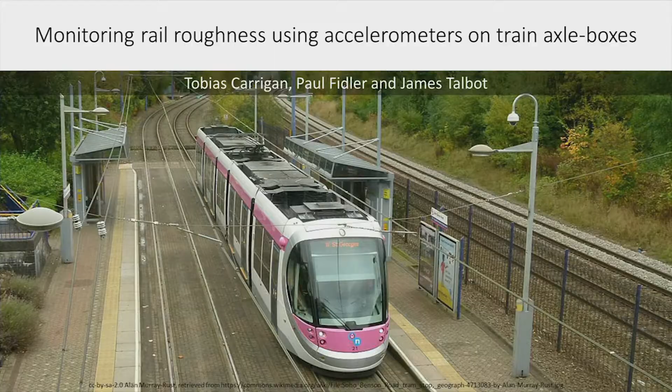So why am I doing this? The roughness of railway tracks increases over time due to wear from trains, and this typically occurs at wavelengths from 3 centimetres to 2 metres.

Sometimes this wavy pattern appears in the railhead, which is called corrugation. This is a problem for rail operators because corrugated rails create high levels of noise and vibration, which is a nuisance to people living near the railway, as well as damaging trains.

Currently, the railways are manually inspected for high levels of roughness, such as by using dedicated measurement trains. But this tends to be costly and time-consuming.

So I'm proposing a more efficient method, which is to use sensors on in-service trains, as I said previously.

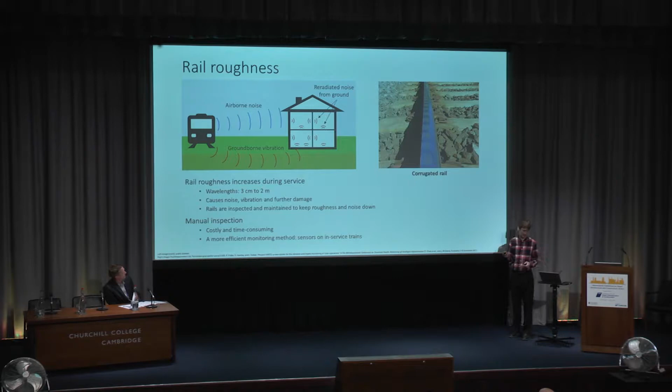There are sensors that directly measure rail roughness, such as by physical contact or lasers, but these tend to be fragile and awkward to maintain, so they're not suitable for in-service trains.

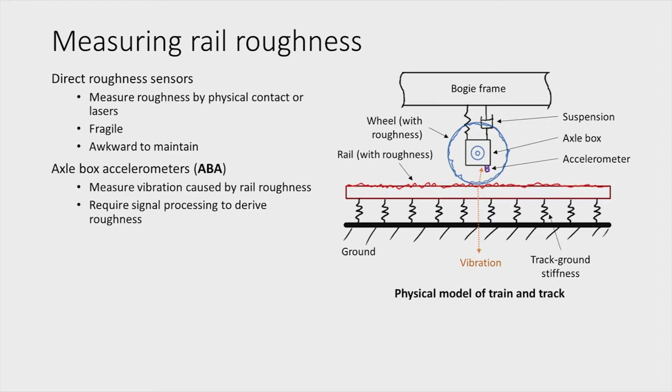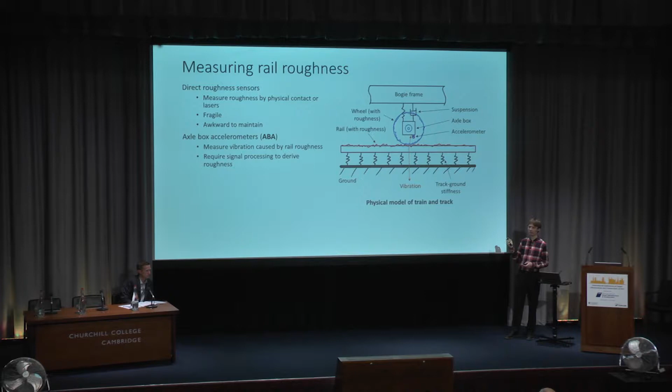Instead, accelerometers are more suitable because they are practically maintenance-free, and we fit one of these accelerometers onto a part of the train's bogie called the axle box, and we call it an axle box accelerometer, or ABA, not to be confused with the band.

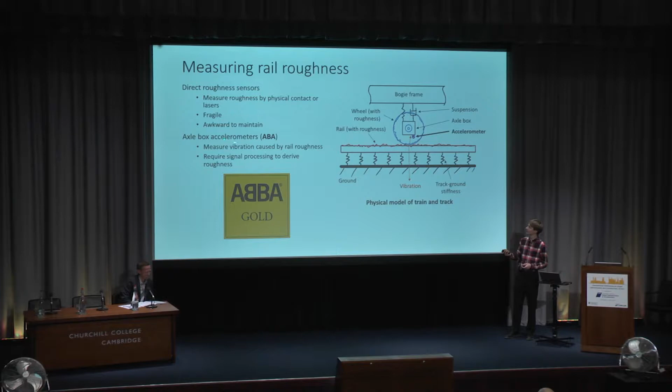ABA measures vibration caused by rail roughness rather than the roughness itself, so it requires signal processing techniques to derive the roughness from the ABA measurements.

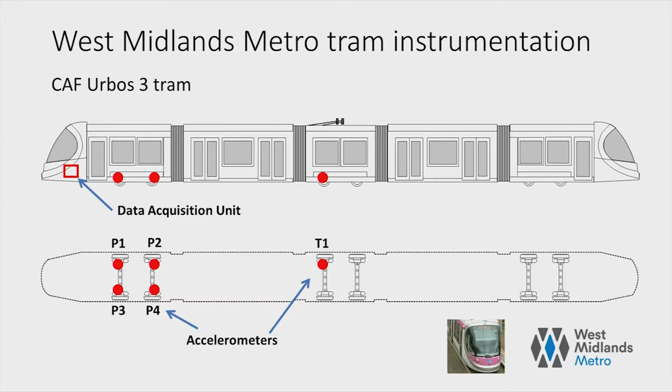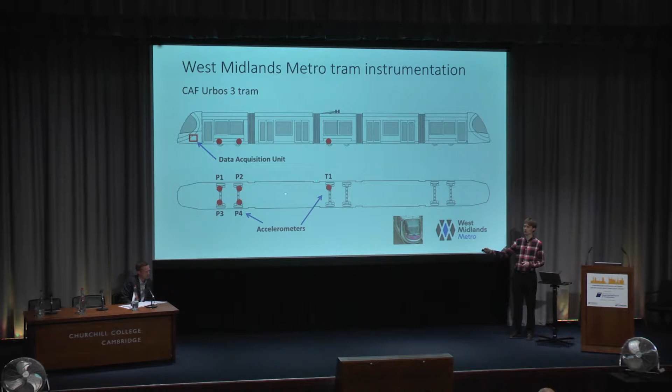We have collected measurements from a trial system on one of the West Midlands Metro trams. This is a CAF Urbos 3 tram, and it has independent wheels connected across by axle beams to enable a low-floor design. We fitted 5 accelerometers, 4 on the front power bogie and 1 on the trailer bogie.

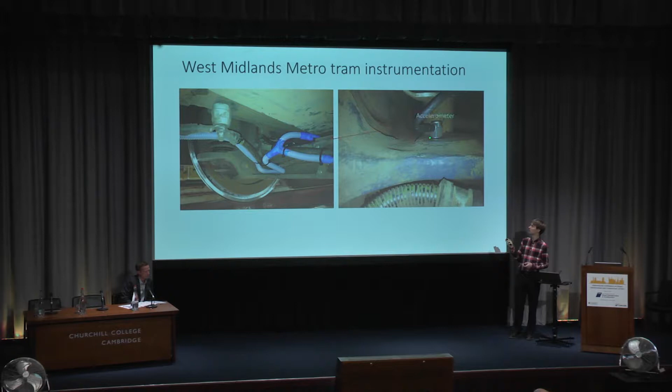This shows one of the axle beams, and this is one of the accelerometers attached to the beam near the wheel bearing.

Now I will show you measurements from the system, which covers the West Midlands Metro network from Wolverhampton to Birmingham.

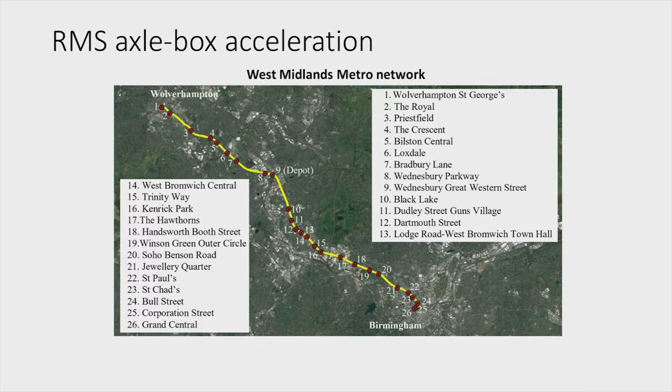This graph shows the root mean square, or RMS, of ABA from Wolverhampton to the middle of the network over 50-metre segments. It shows data from April 2017 to October 2018, heading down the colour spectrum, and the symbols here show where the stations are.

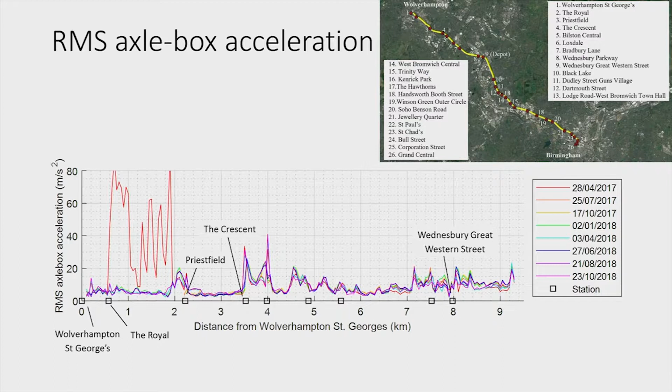In mid-2017, the track between The Royal and Priestfield was very rough, but it was replaced in December that year, and you can see the big difference in RMS levels here.

Now, these measurements don't quantify rail roughness by themselves, so they need some signal processing techniques to derive rail roughness from ABA, which is what rail operators would like to measure.

Rail roughness is connected to ABA through the dynamic train track system. This is a diagram of the train track system, which has a wheel and track with a roughness profile moving between the wheel and rail and exciting vibrations in the system.

We are measuring ABA, which I'm assuming is the vertical acceleration of the wheel. The key point here is that the measurement depends not only on rail roughness, but also on the system itself, so we need to know the system in order to derive rail roughness from ABA.

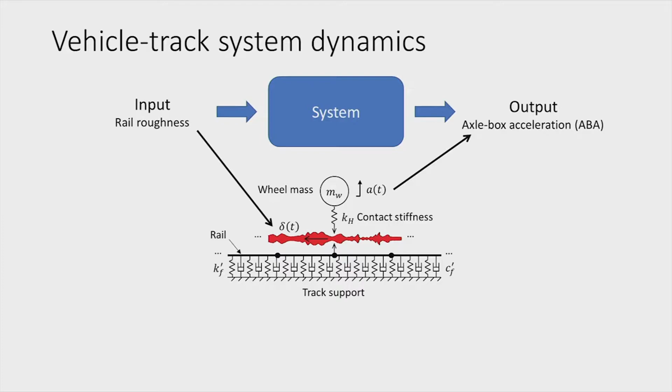I can represent the system as a transfer function, h of omega, and this graph shows what h of omega might look like.

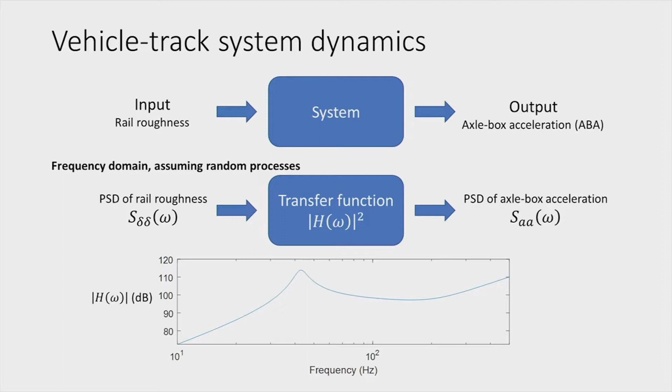To get rail roughness, if we treat rail roughness as random processes, then the PSD of rail roughness is multiplied by the square of the transfer function to get the PSD of ABA.

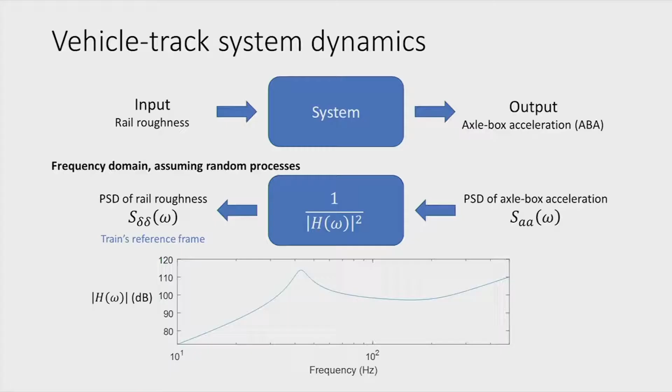Now we can derive the roughness by simply inverting this transfer function, but we want the roughness in the fixed reference frame rather than from the train's point of view. So we translate it into the wave number domain.

Wave number is the number of oscillations, radians of oscillation per meter rather than per second. So that removes the dependence on the train motion.

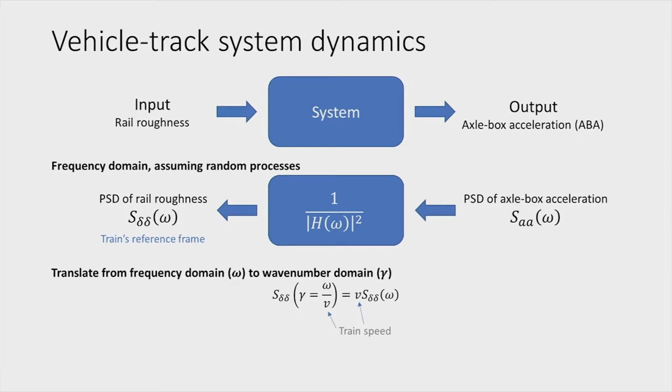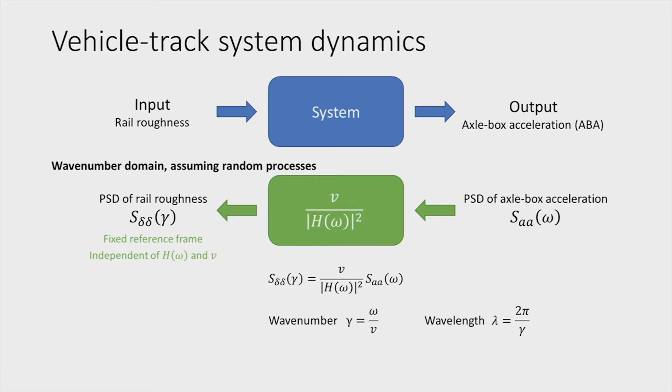This leads us to the final equation. And for completeness, wavelength is 2 pi over wave number. The roughness PSD shows the amounts of roughness at each wavelength, independent of the transfer function and the train speed, which will be useful for rail operators to optimize track maintenance schedules.

I'll go into some more detail on how we calculate the power spectral density of the ABA signal. We use the square magnitude Fourier transform, which we call the periodogram, and we apply a window function to the signal before taking the Fourier transform.

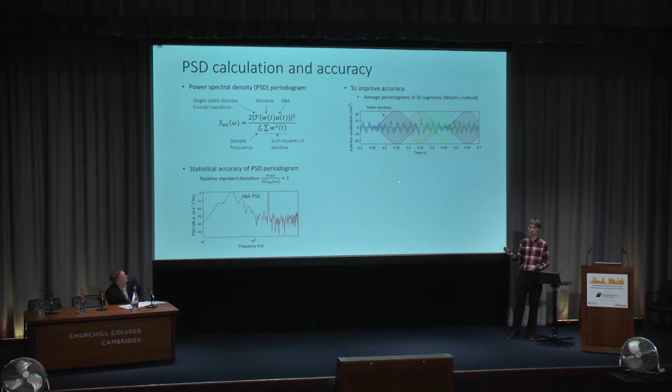One way is to average together periodograms of multiple segments of the signal, which is essentially Welch's method. This method splits the tracks in the signal into several segments, which are overlapped with each other, and a hanning window is applied to each segment.

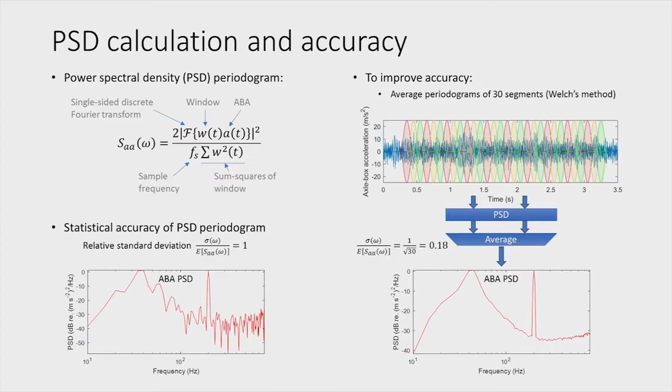I use 30 segments in total to improve the statistical accuracy, and this makes the spectrum much smoother. Now, improving the accuracy trades off the resolution of the spectrum, and this trade-off depends on the requirements of the system.

For our work, we've used the standard EN 15610, which is commonly used in industry and by researchers to plot rail roughness spectra.

It recommends a spatial resolution, or total track length, of 60 times the maximum wavelength, and a segment length of 4 times. So that's why we chose 30 segments. This diagram shows how the wavelength, segment length, and spatial resolution are correlated with each other.

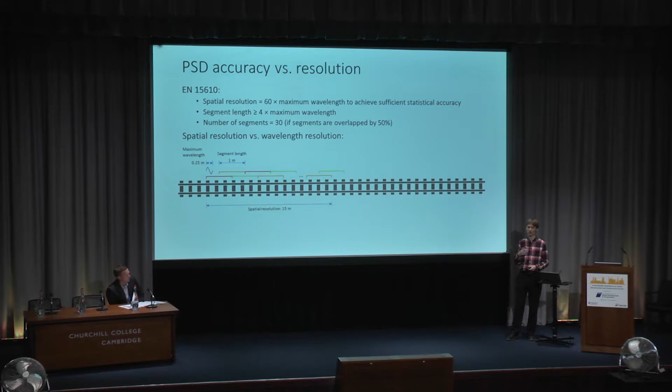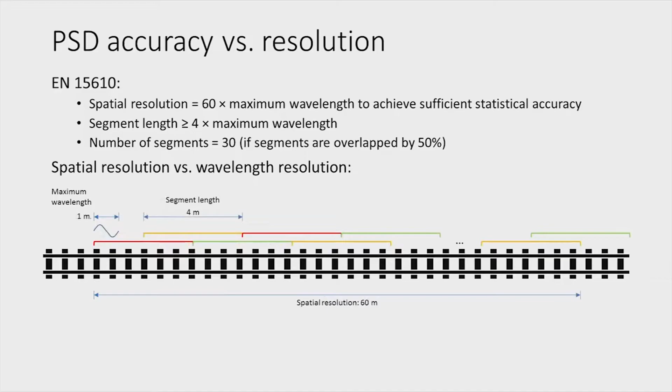The standard specifies wavelengths up to 0.25 meters, but actually corrugation can occur at longer wavelengths as well, and ground-borne noise is also relevant at these longer wavelengths. So we chose to increase that to 1 meter, which gives this segment length and spatial resolution.

The same standard also recommends plotting the roughness as third octave spectra like this. I wonder if you've seen a third octave spectrum before. You can see on the wavelength axis that the wavelength doubles every 3 bands. The y-axis is in decibels relative to 1 micrometer, so 0 decibels is an RMS amplitude of 1 micrometer.

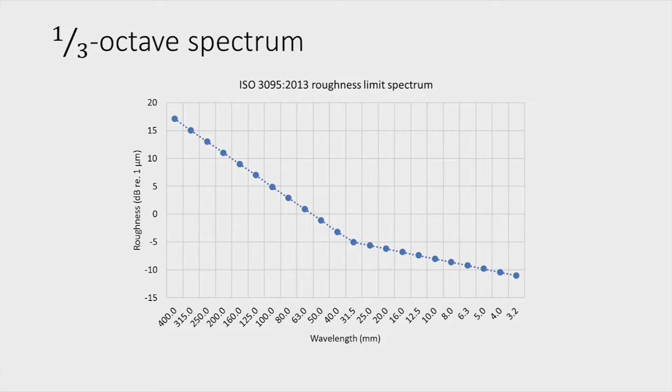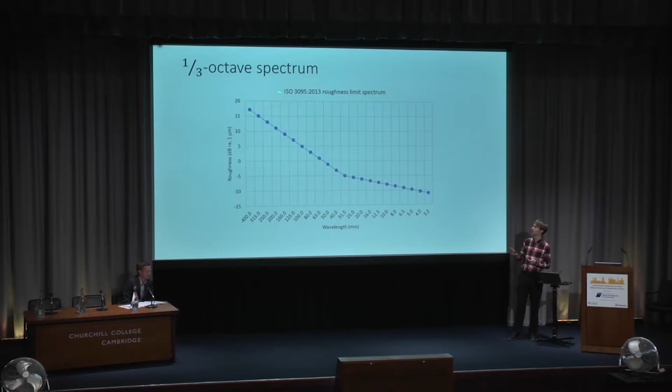This particular spectrum is the limit spectrum for the roughness of a section of test track that is used to type test new rail vehicles, and it's given in this standard, ISO 3095. But it's a useful spectrum because it's close to the typical roughness of railway track, so we use this spectrum in our simulations.

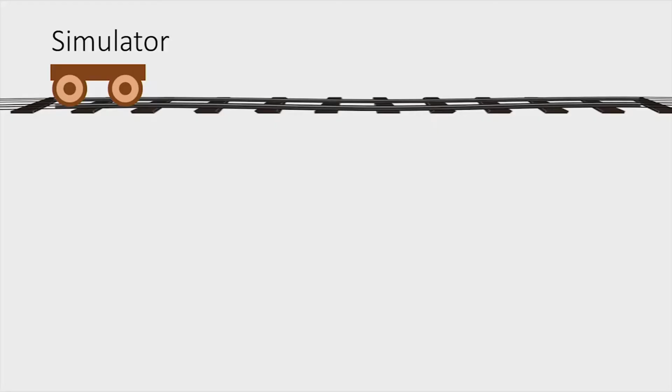We have developed a theoretical simulator to test and evaluate the techniques to derive the roughness from ABA. The simulator uses a time domain model, based on a beam on elastic foundation to represent the track, and a lumped mass to represent the unsprung mass of the train. This may appear oversimplified, but the wheel mass is essentially decoupled from the rest of the train by the soft primary suspension.

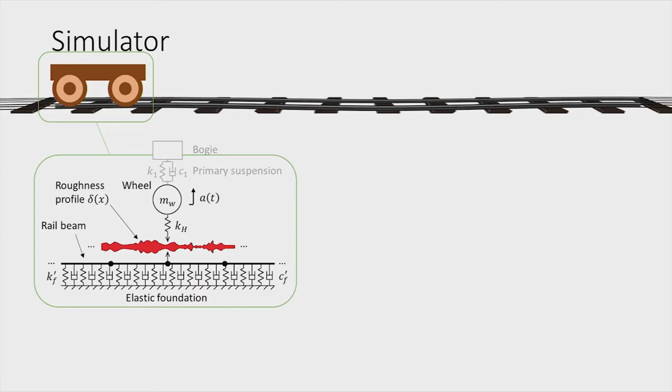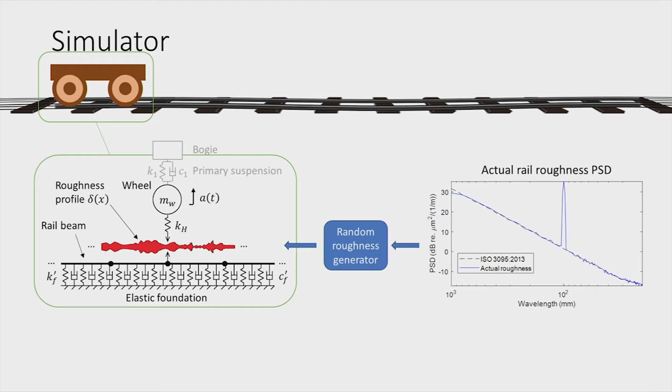The simulator calculates an ABA signal given a rail roughness spectrum and the parameters of the system. I chose the ISO 3095 spectrum, but with a sine wave peak added to represent corrugation, and I generate a random profile for the simulator.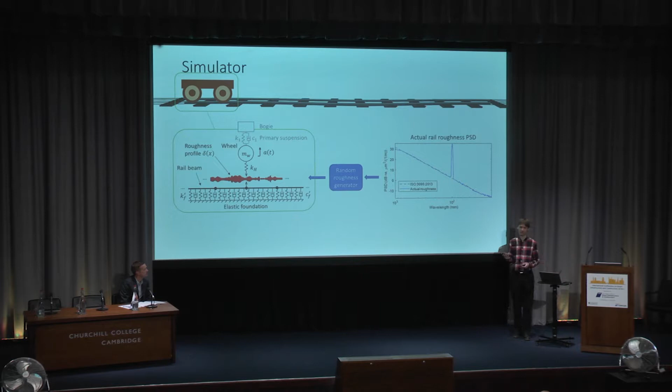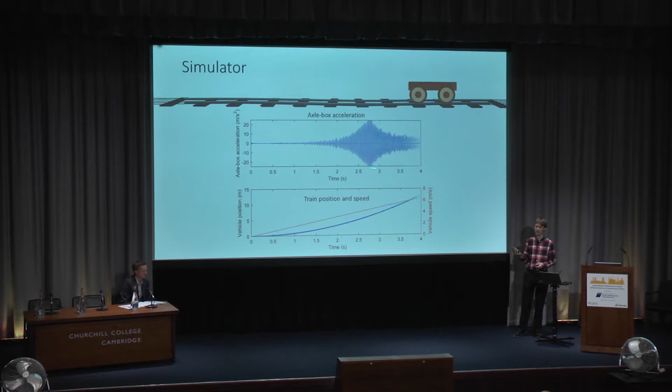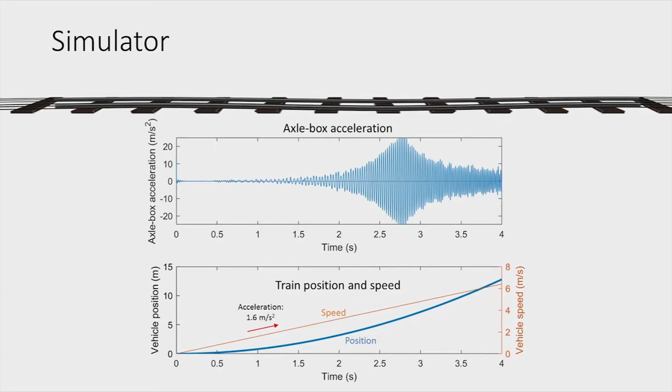Suppose that the train is stopped at a station on the left, and now it is accelerating, and we're recording the ABA signal arising from the roughness on the track, along with the train speed. As you can see, the signal is very low when the train is slow, but as it speeds up, the magnitude increases through a resonance, and the frequency increases as well.

Now, I'll show you how I use a modified form of Welch's method to calculate the PSD of rail roughness for a train that is varying its speed along the track.

I split the track into 4-meter segments like this that are overlapped by 50% and map these segment boundaries onto the ABA signal like this.

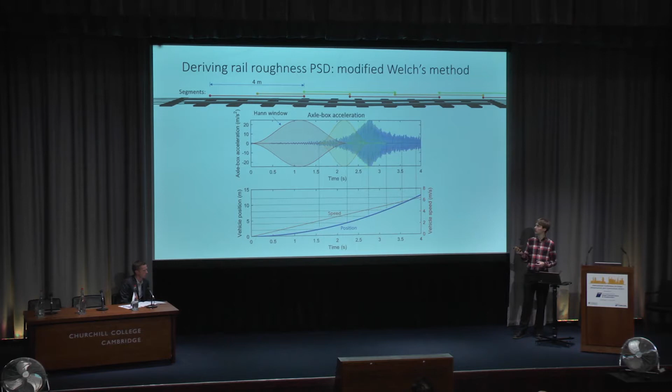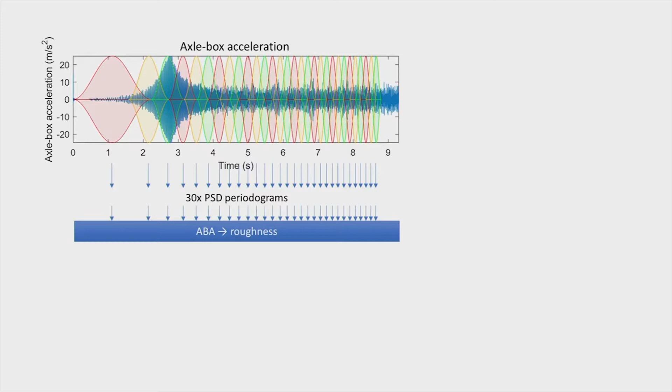I take the segments and apply a Hann window to them like this, up to 30 segments. I then calculate the PSD periodograms of the ABA segments and derive the roughness periodograms, translating them to wave number domain using this equation.

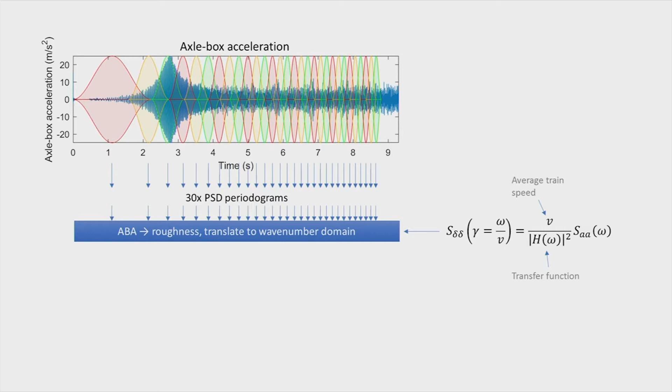The translation uses the average train speed in each segment, like this. Finally, I average together all the 30 periodograms, which gives me this spectrum. I can see that the derived spectrum is very close to the actual roughness, but the peak is smeared out.

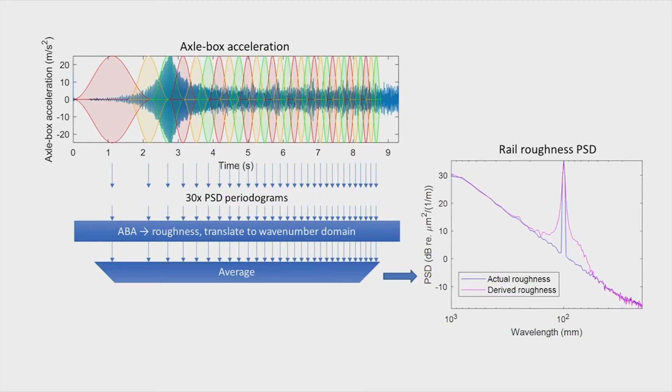This smearing is caused by the assumption that the train speed is constant within each segment, but actually it is varying. So how do I reduce the smearing?

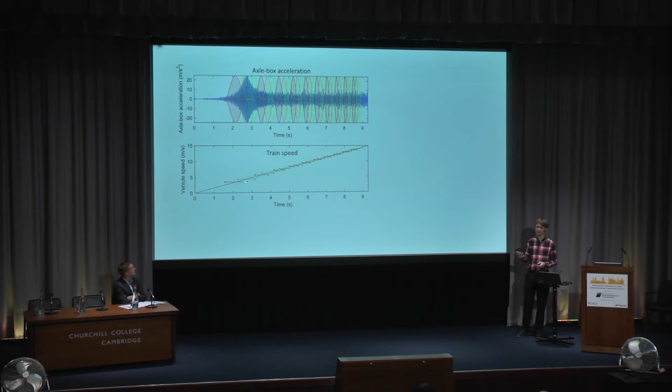Actually the smearing is coming from the first segment because that has the widest speed range. So I can reduce the smearing by removing this first segment. Now comparing the results with and without that first segment, you can see that has reduced the smearing.

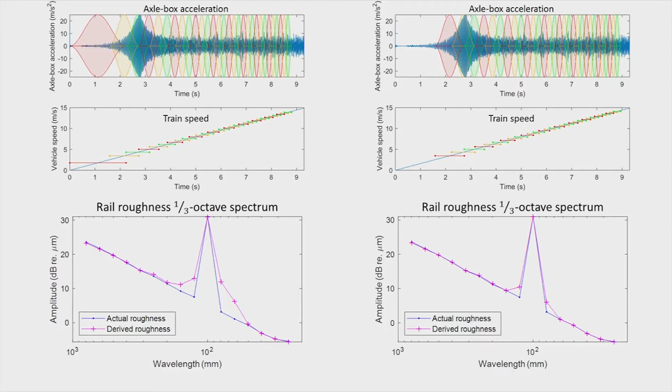I'll replot this as third octave spectra to see more of a real-world impact. I can see that there's still too much smearing, so I will take another segment away, and a third one. And now you can see that the derived roughness agrees with the actual roughness very closely.

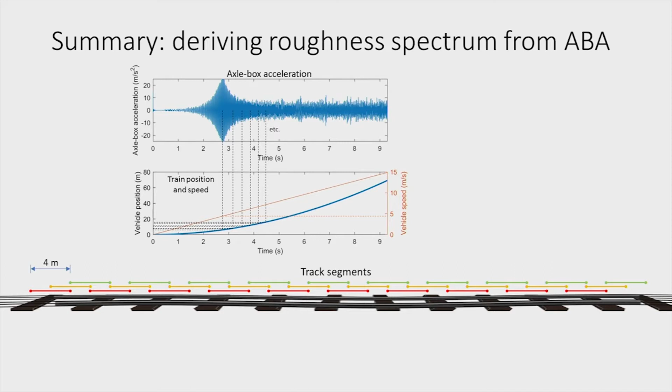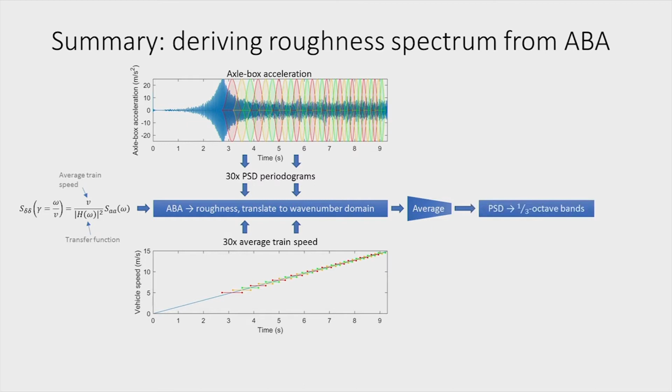I've used the segments at vehicle speeds above 5 meters per second, excluding only 6 meters of track. Just to recap, I split the ABA signal into segments according to vehicle position, excluding data below 5 meters per second. I then calculate the periodograms of the segments, translate them into roughness in the wave number domain using the average train speed, average the periodograms together, and plot them as a third octave spectrum.

So far, we've assumed that we know the system exactly, but in reality we don't have the exact transfer function for a real railway vehicle and track. But we can approximate it using a model like this.

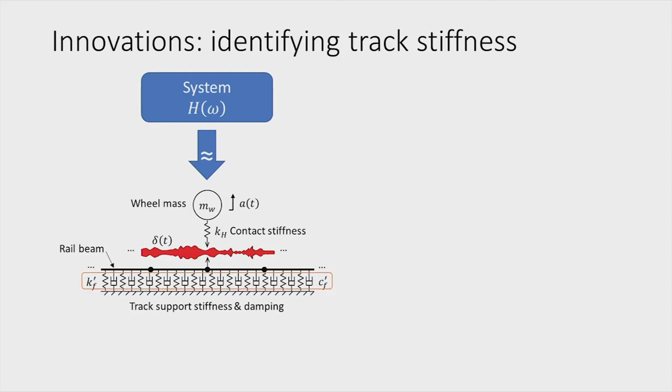Looking at the model, most of the parameters can be measured or calculated, but the track support stiffness and damping is probably the least known and most varying of the parameters. This is a problem that is perhaps blocking the widespread use of axle box accelerometers, as this idea has been around for at least 10 years.

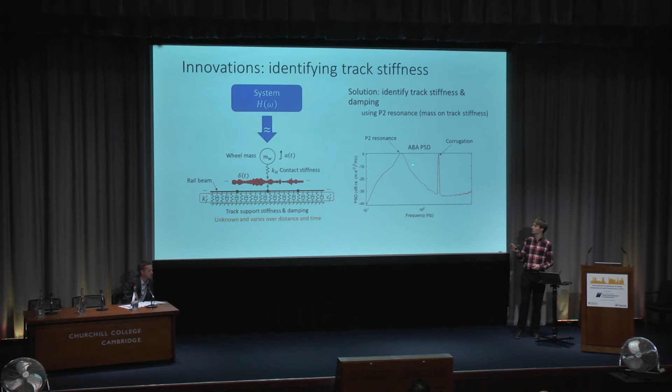So we're developing a solution to this problem that identifies the track stiffness and damping using the P2 resonance in the ABA spectrum. This resonance is the wheel and rail masses vibrating on the track stiffness. Knowing the vehicle and rail parameters, we can derive the track stiffness from the frequency and width of this P2 resonance.

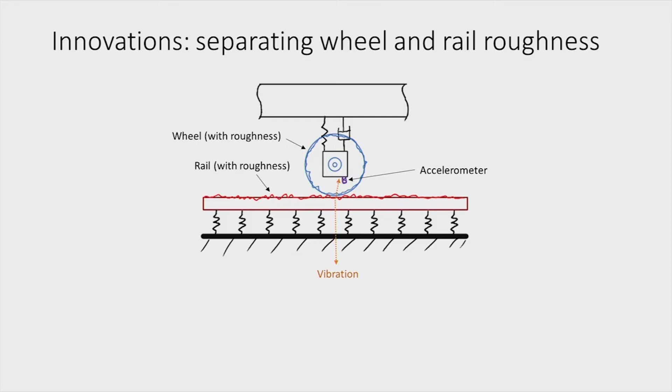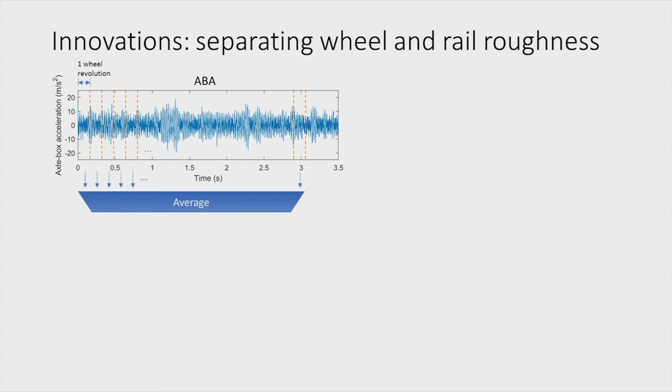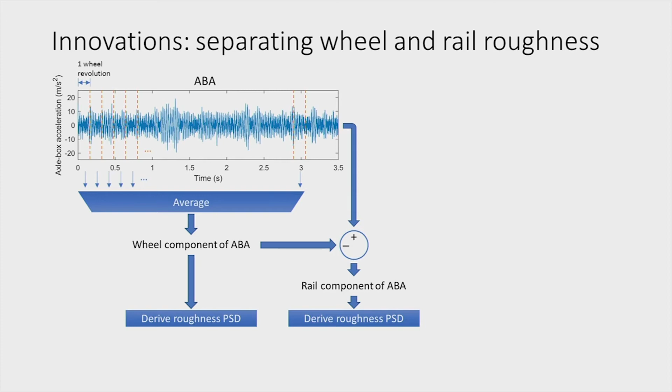Another problem we've tackled is that the wheel can have roughness as well as the rail, and both are added together in the ABA signal. But we can separate the wheel and rail roughness spectra by averaging together portions of the ABA signal over consecutive wheel revolutions. This gives us the wheel component of ABA, and the rail component is the signal minus the wheel component. Putting these through the roughness derivation techniques gives the separated wheel and rail roughness PSDs.

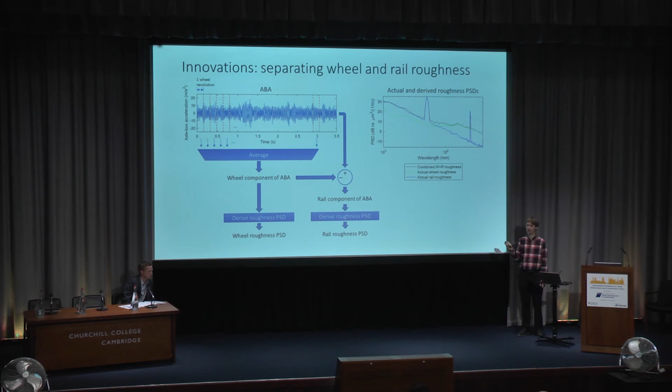To test this, I've simulated a combined wheel and rail roughness profile, where the green line is the actual wheel roughness and the blue line is for the rail. I'm going to add the results onto the same graph — this is the derived wheel roughness, and the red line is the rail. You can see that they agree with the actual spectra very closely.

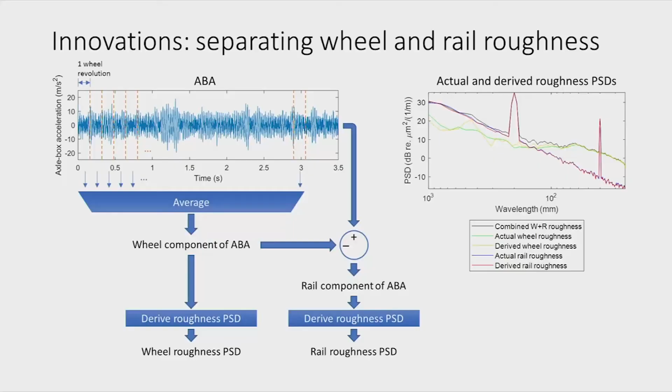To summarize, we are measuring rail roughness because it causes noise, vibration, and damage to the infrastructure as well. Axle box accelerometers can be a more cost-effective way of monitoring the condition of a rail network.

I've demonstrated a technique to derive the roughness spectrum from ABA, given the transfer function and train speed. The track stiffness can be identified from the resonances in the ABA spectrum. I've discussed the trade-off in accuracy and resolution of the spectrum, and I've plotted my spectra according to this standard.

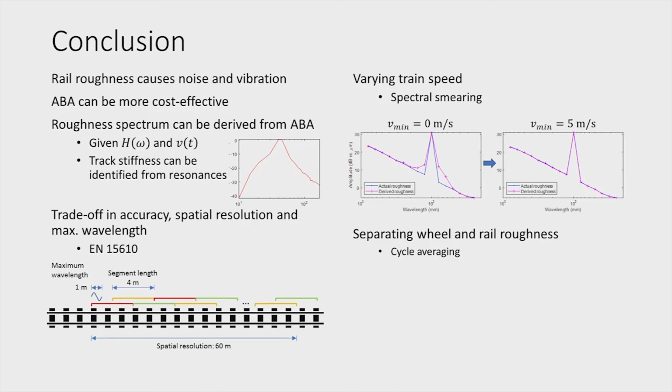I've shown that varying train speeds can cause smearing in the spectra, but if it excludes segments at vehicle speeds below 5 meters per second, then I can limit the smearing. Finally, I've demonstrated how wheel and rail roughness can be separated by cycle averaging, which is another issue with using axle box accelerometers.

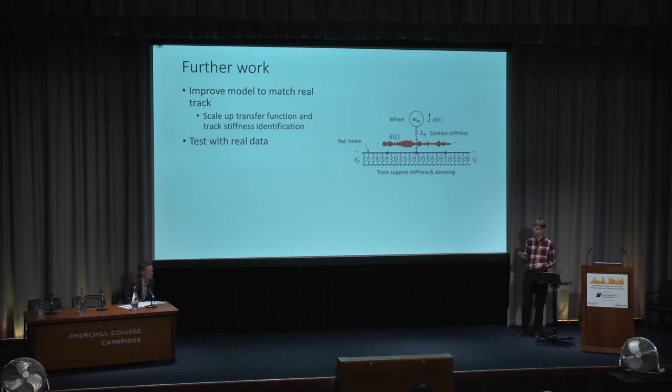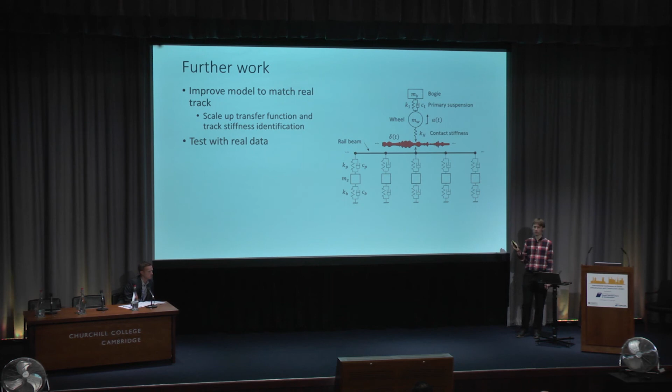So far, we have tested these techniques in a simulated environment with a simple model of the train and track. Further work will scale up the track model and techniques to approach the behaviour of real track. Once we have achieved this, we will test the techniques with real data and compare them with existing methods of measuring rail roughness.

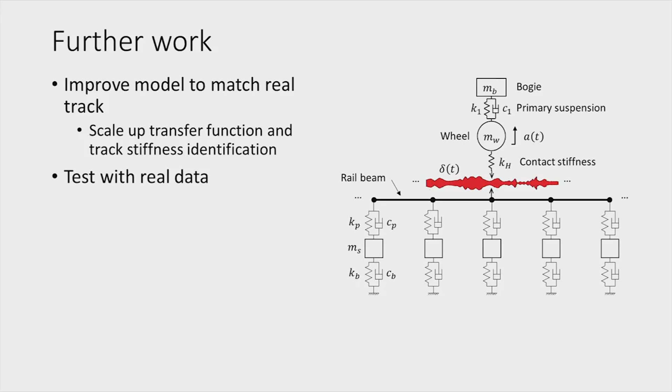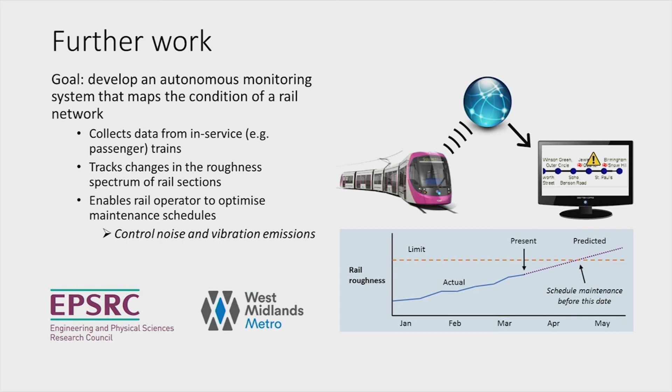These techniques go towards a wider goal of developing an autonomous monitoring system that maps the condition of a rail network using axle box accelerometers on passenger trains. It aids in tracking changes in the roughness of sections of the rail network, enabling the rail operator to optimize maintenance schedules in order to control noise and vibration.